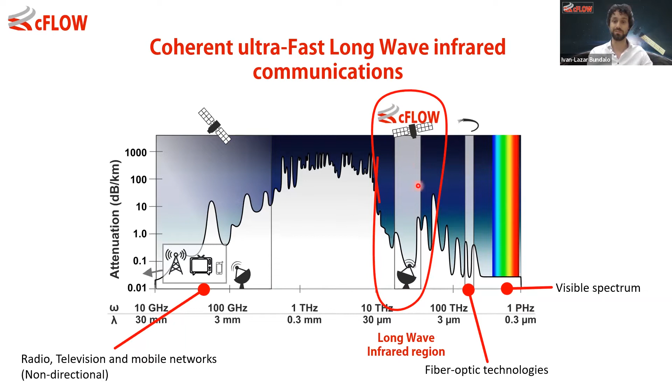That's the region which, as you can see over here, also has a dip in the atmospheric absorbance, which means that the light can go much further through the atmosphere. And as we've shown in some of the previous webinars, the effects of the atmosphere are much lower. So cFLOW is the project which is aiming to develop this wavelength region and all of the corresponding technologies.

So the goals of the project are really to develop this 8 to 14 micrometer part of the spectrum for free space communications, which so far was untapped, and to develop it for the unmatched speeds of 20 to 100 gigabits per second. These systems would be operating at room temperature, and they would be very compact, so they would be using photonic integrated circuit technologies.

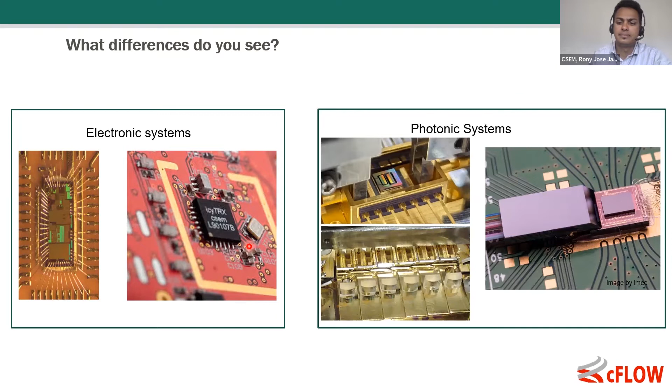I promise you, I won't go for a coffee. I'll still be here. So 10 seconds. Okay. I know you cannot speak because Lazar has muted all of you.

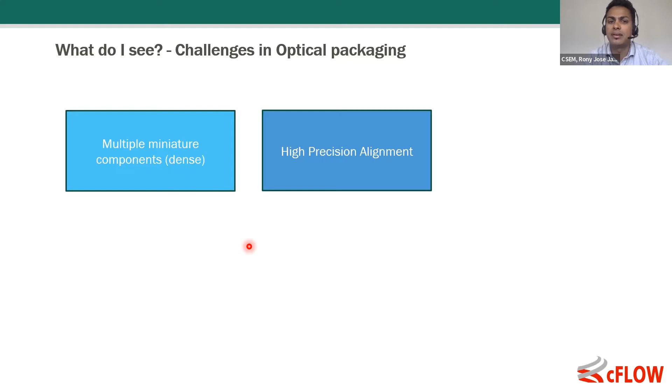So what I see actually is a lot of multiple miniature components, and they are very densely packaged in the optical or photonic packages compared to the electronic systems, obviously. They are densely populated, but aligned quite well to each other. And what you also see is a lot of metals. No PCBs, you see mainly gold and copper, which is basically the thermal management. There's a lot of heat. The lasers are not really highly efficient, so you need to transfer a lot of heat.

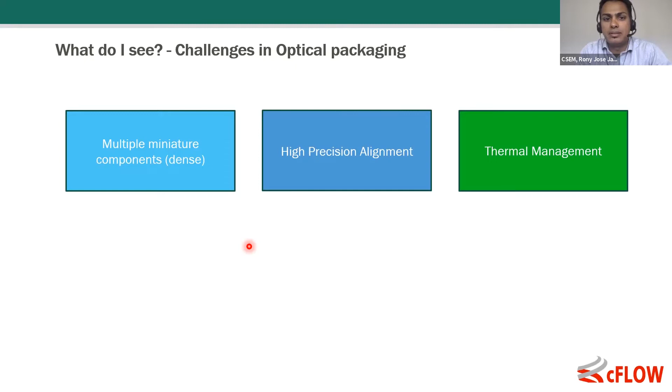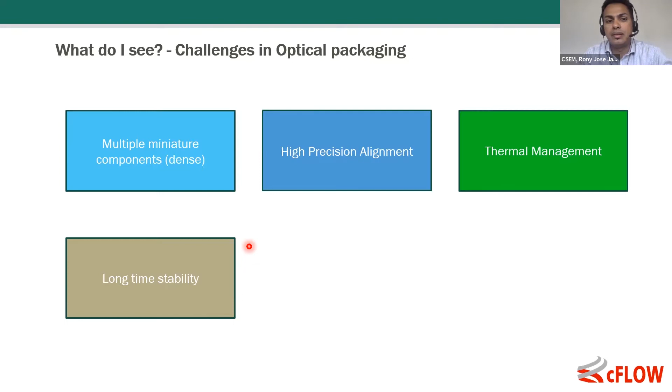Not only that, you also have to keep the lasers or other optical components at a specific temperature to have them operational with the right specifications. Other issues that you don't see, obviously, are long-term stability. If you have an aligned system, you don't want to lose the stability for years to come. That's why it's also important to seal it hermetically and to have everything really stable for a very long time. And compared to the electronic system, you also need optical transparency here.

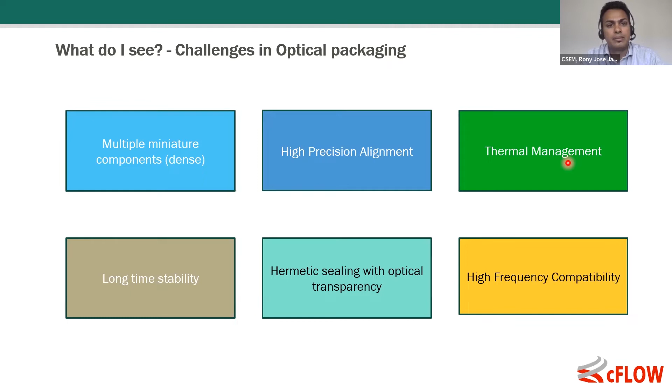And what Lazar showed you right now is that we need very high frequencies. Otherwise, it doesn't give an advantage over other systems, because the biggest advantage in cFLOW is the very high bandwidth we can reach. So it's important to have very high frequency compatibility. Right now, I will focus more on the multiple miniature components and high precision alignment, because that's what we are focusing on in the cFLOW project.

Obviously, the other things are also important, like the thermal management. We are also focusing on it, but right now less. And the high frequency is also very important. But I will speak more about the multiple miniature components and the high precision alignment. And in the project, I think we are not going to work on hermetic sealing and long-term stability.

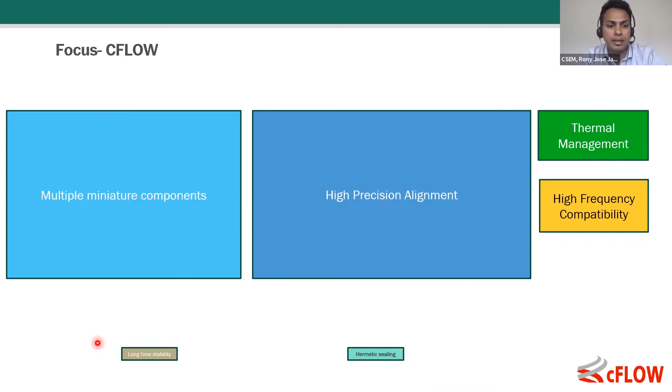So active alignment, so high precision alignment. There are two different types of alignment, as you might know already. One is the active alignment, where you have, for example, a fiber which is coupled into a PIC. In active alignment, you align the fiber to the PIC by seeing the output of the PIC to see how much power or intensity is coupled into it. And so you have a feedback loop. You check how much intensity you have, and you change the fiber accordingly, and you move it until you have the best configuration.

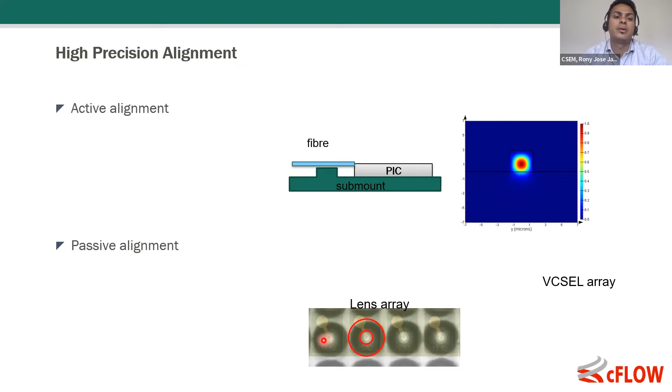But in a passive alignment, you don't have a control loop. Basically, what you see here is, sorry, that was a mistake. This is a VCSEL array here, and this is a lens array. So if you have very accurate structures which you can align to each other, then you can just bring them together with the machine in a passive way. So what you do is look at different structures on the chip and the lens array, and then you have a very good alignment. The difference then is that you don't have a control loop, so you don't see the output. You're just focusing on the structures on both the chip and the substrate.

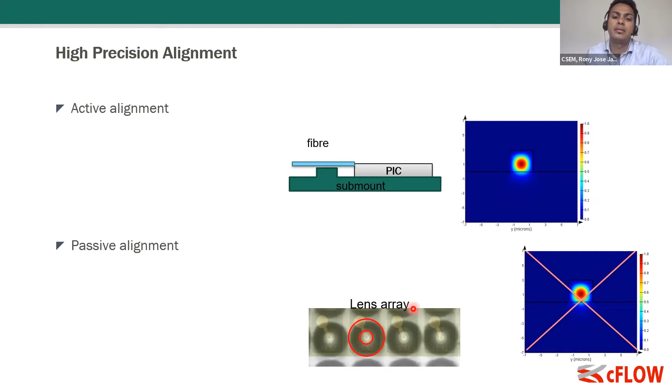So what is the difference between these two? Basically, as you might have already guessed, passive alignment is quite fast compared to the active alignment. So in principle, that also says that the cost of the passive alignment is much lower compared to active alignment. Passive alignment usually takes much less time, can be less than 1 second in some cases, depending on the accuracy required. And in active alignment, you have tens of seconds to maybe minutes, depending on the complexity of the parts. The industry standard for passive alignment has come maybe near to 2 micron accuracy tolerance, but with a little bit more time. So it's not so fast as 1 second, but it needs more time.

So I give you a couple of examples of passive alignment and active alignment. This is, for example, a transceiver application, that's what you see here. What we have to do is to have VCSELs and then use optics to couple it into a fiber which is outside of this package. This is a good example where we can use passive alignment. As you see here, this is the ray tracing simulation, the sensitivity analysis to see how much tolerance you have. As you can see, it's plus or minus 10 micrometers tolerance required here. This can be easily achieved with the die bonding or flip chip machine. So this kind of application is an ideal case for a passive alignment.

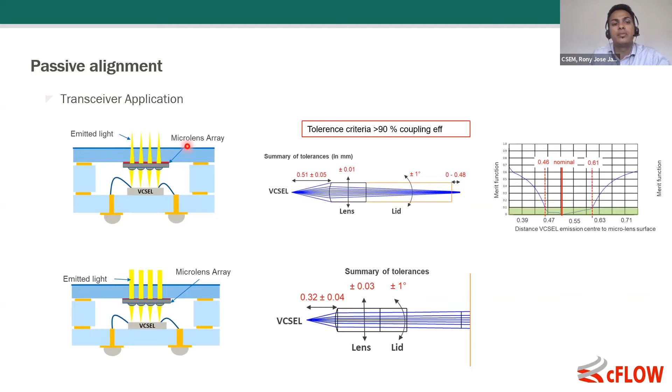And here, for example, you are focusing the beam, and here you are collimating the beam outside. In this case of collimation, you can even have a larger tolerance, so this is much more lenient compared to this case. So what was the criteria here? The tolerance criteria was a coupling of 90% or more into the fiber, which is outside of this package. So what we achieved, these are the samples we have already manufactured. This is an ESA funded project, and we could achieve quite well the 10 micron alignment tolerance that was needed for these packages. And it's passive aligned, so it's a much faster process in this case.

So in case of active alignment, why do we need active alignment then? There are cases where you need much more accurate alignments. For example, here you have a fiber and you want to couple from a PIC, which has a very small size compared to a fiber. The fiber is only 9 microns, and your tolerances are maybe 1 to 3 microns. When you couple the PIC to this fiber, this is quite difficult because you have a large difference in the modes. So you have to use an edge coupler. As you see, you increase the size of the mode field to around 3 micrometers here. And then you have an alignment tolerance of less than 1 micron, which is very difficult to achieve with passive alignment.

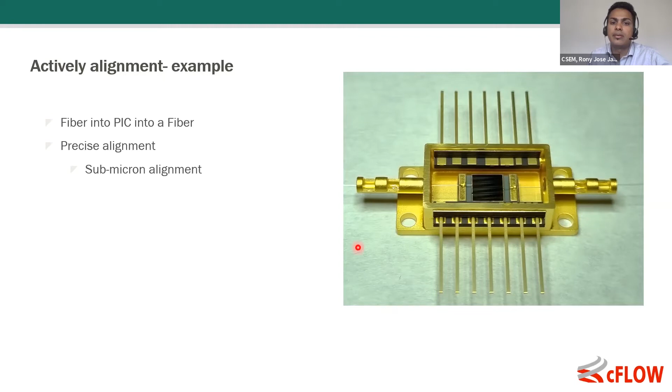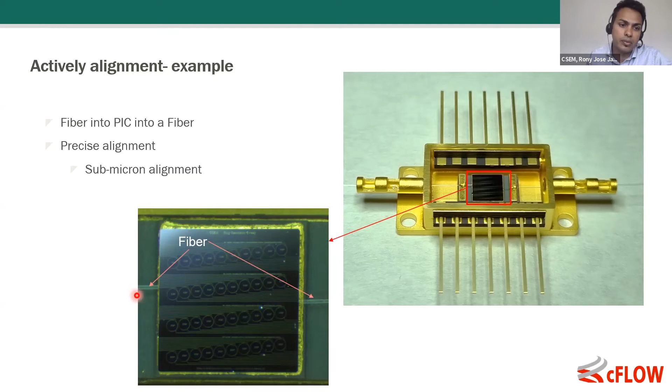So this is an example where it would be very important to have an active alignment compared to passive alignment. So this is an example of such a system which was fabricated here. Here we have a fiber which is coupled into a photonic integrated circuit and going out into another fiber. So here we need a very precise alignment, and this was done with active alignment with sub-micron accuracy. So this is just magnification of the PIC and how the fiber is coupled into the PIC.

So I have a video of how this alignment is done. So as I told, the passive alignment is improving and active alignment is improving. So active alignment is improving in the sense that things are getting automated. So a lot of processes can be made much faster. So I have to start the video now.

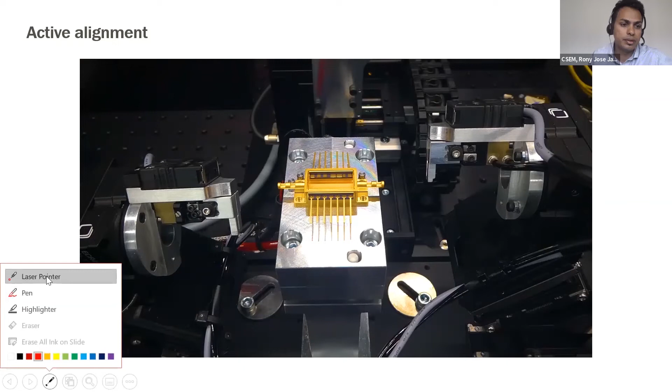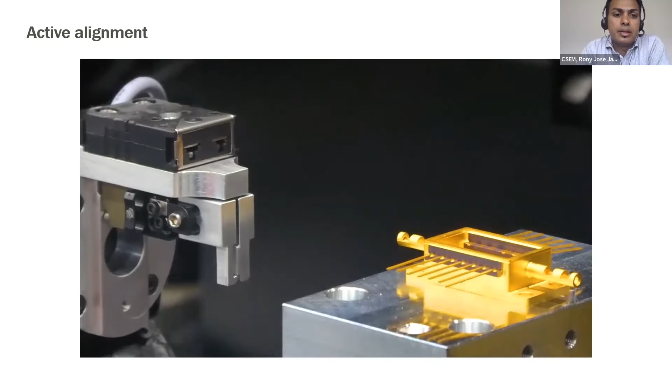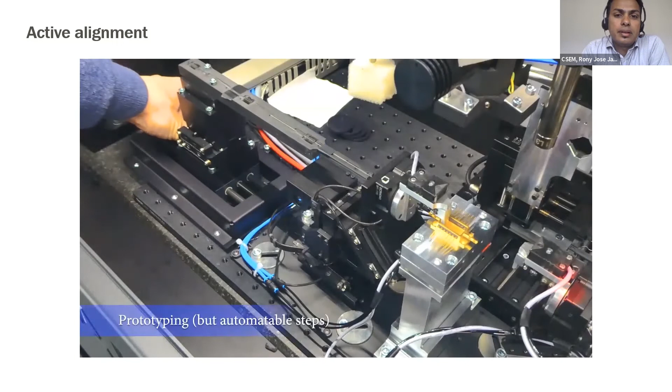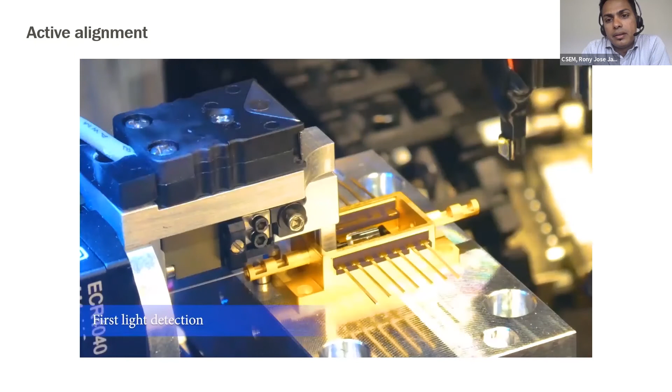So what you see is first the calibration of all the stages. It has 6 degrees of freedom. And now this is a fiber feeder, which is coming into the package. And then we are inserting the fiber here, which is right now manual, but it can be easily automated. And now the active alignment phase, where you come with a photo detector on the other side to see how much laser or light is coupled. And so you can align actively depending on the output on the photo detector.

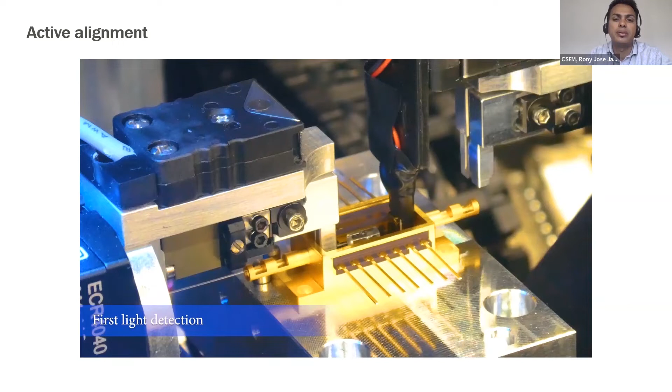So that's one of the examples where we need active alignment. So this is basically what you see on the photo detector. That is how you manipulate the fiber to get the best output out of it. So what is happening now is, as I said, the passive alignment is trying to improve and active alignment is trying to improve. So passive alignment is going more in the range of 1 micrometer, and active alignment is going in the other direction, where it tries to be faster by making automated processes.

But there are still some advantages of each of the methods. For passive alignment, we can use many different bonding methods after aligning, like soldering or silver sintering or adhesive bonding, which is not the case in active alignment. You're restricted to adhesives because you cannot heat up the part during active alignment, or it's very difficult, and you have less freedom to move when you have a solder or a silver sinter.

And right now, for passive alignment the equipment is quite standard or state of the art, so it is less expensive in many cases, depending on the accuracy. And in the case of active alignment, it can be more expensive. Obviously, we still have less accuracy in passive alignment compared to active alignment. And for the benches, you need very highly accurate structures on the substrates to have the alignment properly. So this is also very important.

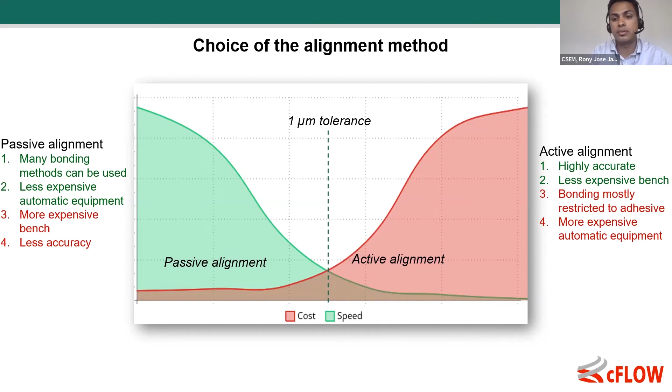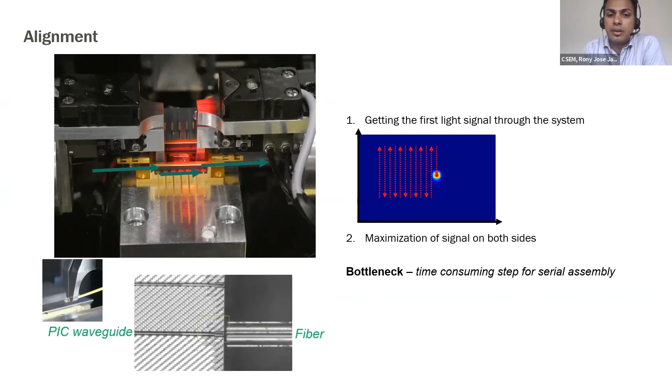So as I said, with active alignment, what we are trying to improve is to have the processes more automated. The most time consuming part here is to scan. So first you have the first light detection, to find where the light is when you couple in, and then to find the optimum, it takes a very long time actually. So there's a lot of steps involved in this. As you can see, you have to scan the whole area, and once you find the spot, then you have to scan it fine to have the best output. So this is where a lot of time is needed for this step.

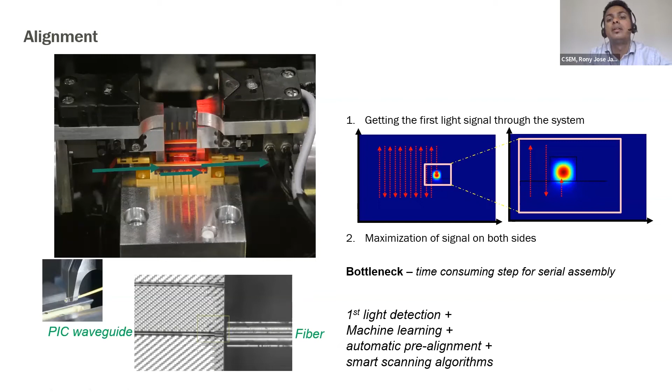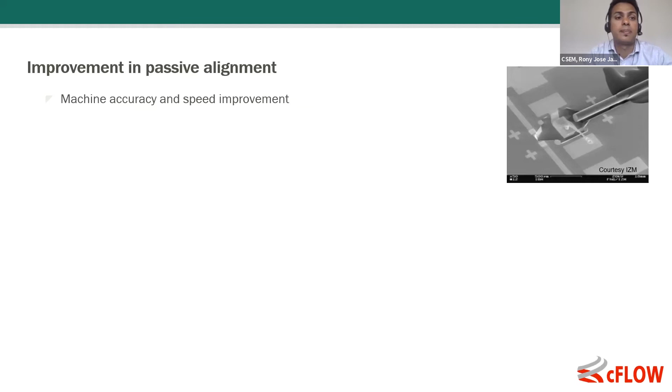So what we are working on is machine learning and other smart algorithms to improve the speed at which the active alignment can be done. On the other hand, for passive alignment, more work is being done on machine accuracy and speed improvement to have a very fast process, and obviously improving the alignment accuracy with very accurate structures. Like now a lot of people are also trying U grooves instead of V grooves, so that it fits the fiber much better, or very highly accurate lithographic structures. So the manufacturing of the structures is getting more and more precise.

And also there is more development to make it even more low cost, using low cost optical benches, sometimes also with molded plastics. But as you know, it has less precision, so it's less accurate, but it has a very high cost advantage. So you could use it for some systems where you don't have a very high accuracy requirement.

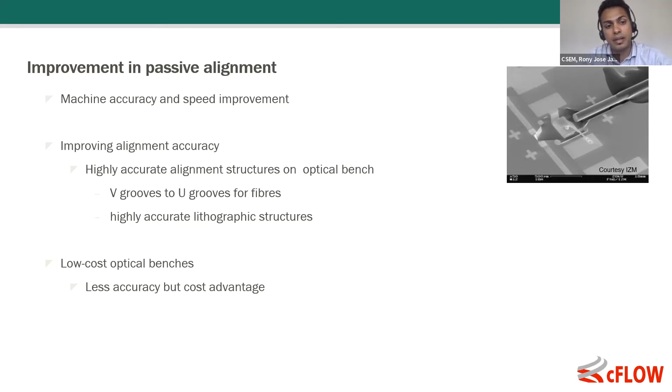What is important is they are all aligned well, and the light is going from one to the other in a very aligned way and without a lot of losses. So that's very important. So what we are trying here is a passive alignment due to many different challenges that I will explain in the next slide. And what we are depending on is using very highly accurate lithographic structures so that we can align it quite precisely.

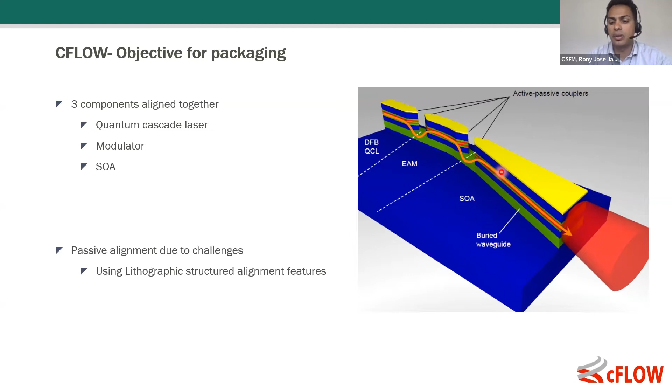So what we are doing is a butt coupling approach. So this is a QCL, a modulator, and the amplifier. As it's an edge emitter, we are going to align the modulator very well to the QCL and the amplifier to the modulator in a butt coupling fashion. So this will be die attached onto a substrate, and everything has to be quite stable, and it has to be very well aligned. So we are using passive alignment.

Why are we using passive alignment? The reason is, first thing is thermal management. So we have 3 active components here, and so using adhesive is not really advisable. So we have to use higher thermal conductivity materials as the die attach material. So this is a case for solders or silver sinters or metal based joints, and this cannot be achieved with active alignment.

And the second thing is the high frequency compatibility. So we cannot use adhesive also because we want to do a flip chip so that there are no wire bonds needed on all these devices. If you have wire bonds, you are restricting the frequency achievable. As you have seen in the other presentations, we are trying to achieve very high frequencies above 20 gigahertz, much above. So it's very important that we do flip chip interconnections here.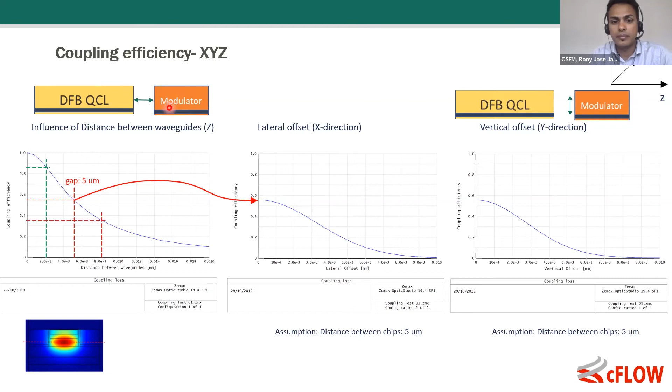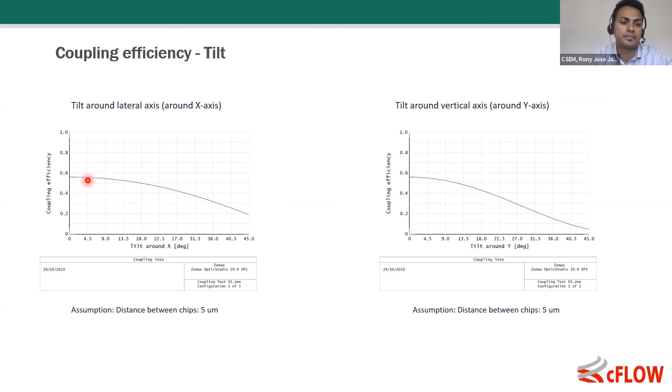So what are the different challenges here? It has to be very highly accurate placement. As I said, it has to be better than 1 micron, at least.

Always the better. If you can get much better, you have more coupling efficiency. Then we are using very thin gold-tin solder, which is less than 4 micron here, as a die attach material, so that we can reduce the Z alignment, or as we call it, the height alignment tolerance. And we have to also use a fluxless solder because we don't want to contaminate the facets, because it's very near to the solder interface.

And the design of parts to enable integration is very important. We have to really control all the sizes here of the chip compared to each other, and also the solder, so that we have the best outcome here. And it's also important to have the right material. So with a small change in the CTE, you already lose a lot of alignment.

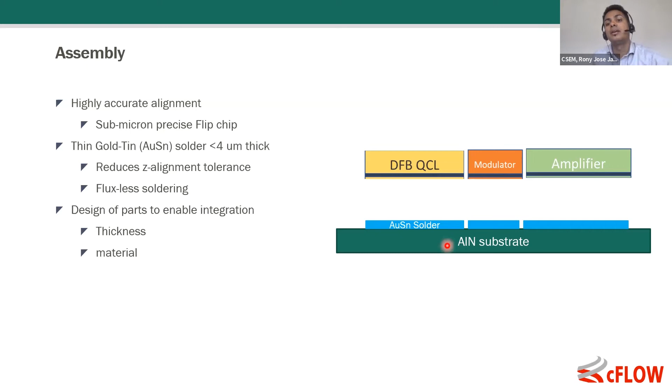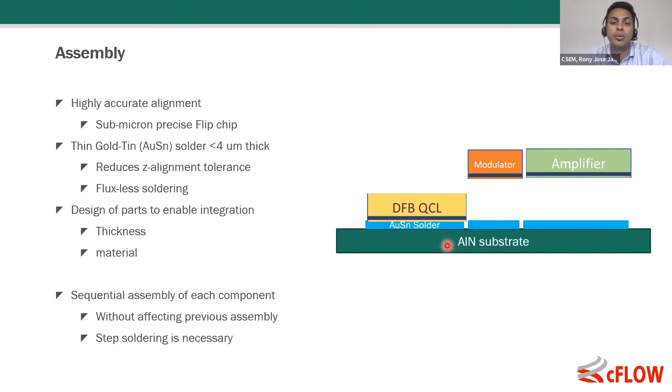So it's a sequential process. That's another challenge that we have here, which means you have to bond one after the other without affecting the previous assembly. If you're bonding the QCL first and you're bonding the modulator second, you don't want the alignment to be lost for the QCL bond. So this is very important that it stays there when we do all the processes for all the steps.

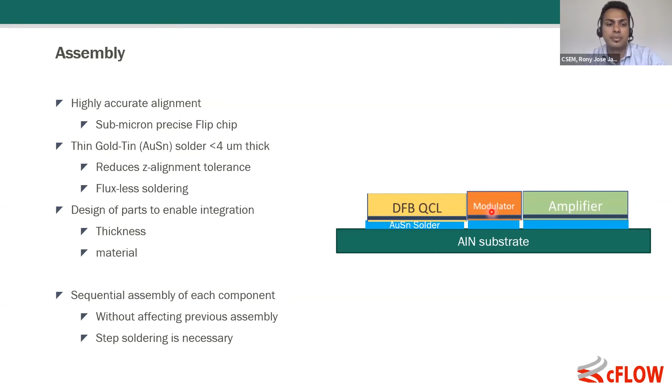So what we are trying to do is to use a few different approaches of step soldering, which means basically that you don't remelt the part which was already bonded when we bond the other parts. So the first method that we are trying to use is transient liquid phase bonding, where we change the phase of the solder so that it doesn't remelt anymore at the melting point of the solder.

So once we make a bond, for example the bond of the QCL on the aluminum nitride substrate, we change the phase into a gold 5 tin or zeta phase, which wouldn't remelt below 400 degrees. This makes it possible to do the other assemblies without disturbing the first bonds. This is one option that we are doing.

Here are some cross sections that you see. This is as deposited. Then you form the eutectic solder, which is the melting solder. And finally, you have the TLP phase, which is the gold 5 tin phase. The solder joint is completely changed into this phase, and now it won't remelt after that.

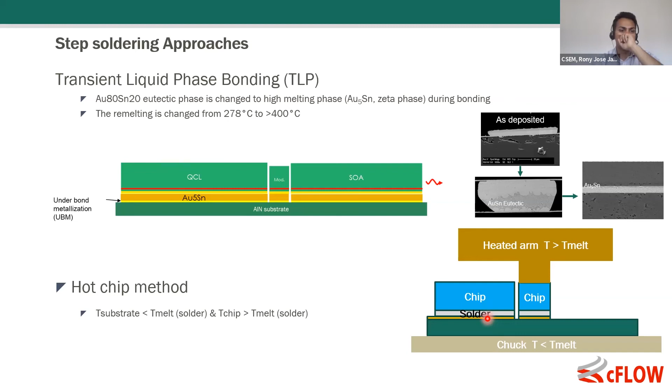What I would like to show now is some of the preliminary results that we achieved. As I said, parallelism and alignment accuracy are very important here. What we achieved, as you see here, is a QCL and a modulator bonded one relative to the other. And we could achieve a parallelism or height control of 0.5 micrometers. So this is quite good in terms of the requirement for this system.

And the second thing is placement proximity, which was very important, as I mentioned in the previous slides, which is the distance between the QCL and the modulator. And as you can see, we could achieve a very good placement accuracy or proximity, and this is also less than 3 microns. So I think we would be able to achieve better than the specifications at this point.

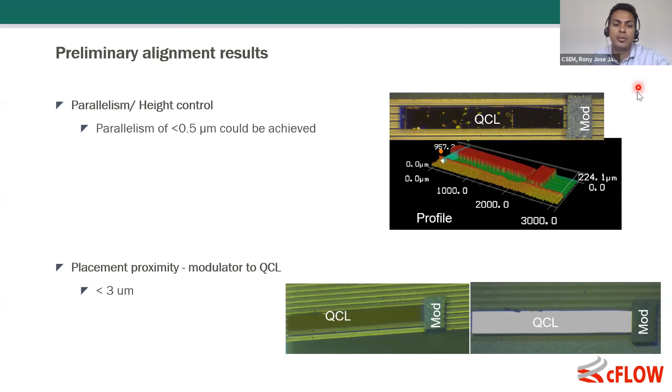But I should say we haven't done any real tests with real devices. These are dummy devices, so we will have to wait and see, or we really have to test the output of the laser power to be sure that everything is working properly. But this is a very good start, and we hope to go forward, and maybe in another webinar we will have more results on this.

So what are the other challenges? I was focusing on the alignment, but as I said, there are a lot of other challenges for photonic systems. What is very important is thermal management, so that all the heat generated by the devices is managed and taken away. We also have to control the temperature to less than 1 Kelvin, or even better than 0.5 Kelvin. So this is also a very big challenge, and it also has to have very high frequency compatibility.

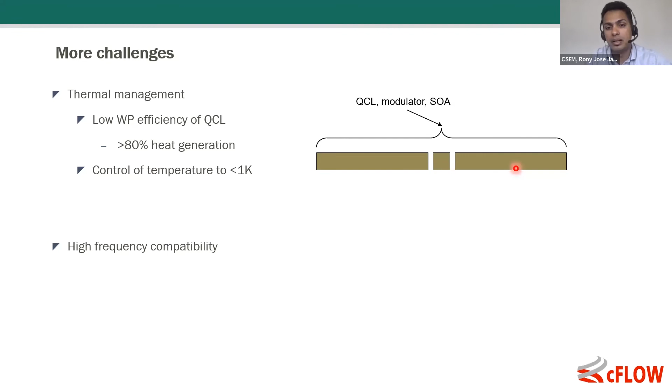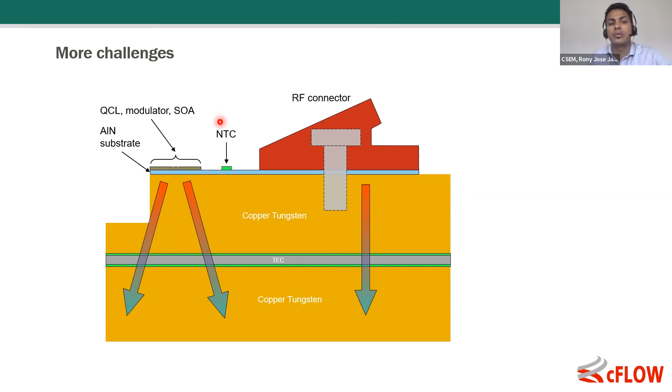So what we were focusing on is this right now, but in principle, this system will really look like that, where you have a lot of thermal management materials here, like you have a heat sink and a TEC, and again a heat sink or a cooler to reduce the temperature and to control the temperature. On the QCL, we will have to use a control loop with the NTC on it. And also the high frequency is also important.

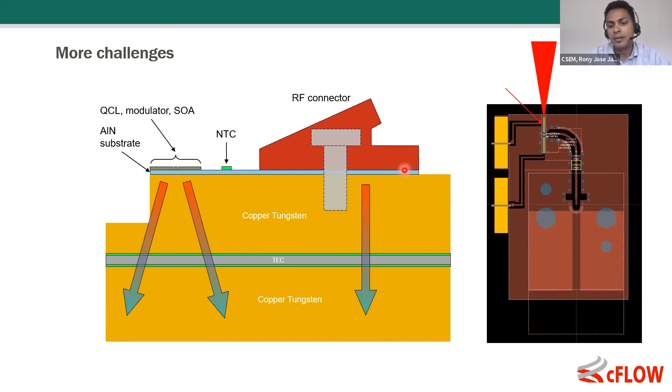So what we are trying to do is also to have everything integrated, also to have the high frequency connectors which can be directly implemented or contacted on the substrate here, where we have aligned the parts together. So conclusion is, packaging has multiple challenges. So what we have to be very careful is the design for integration. So the integration has to be thought about already before designing the parts or components. And it's also important to think about the probabilistic design for reliability, which means you also have to think about reliability, what kind of materials to use.

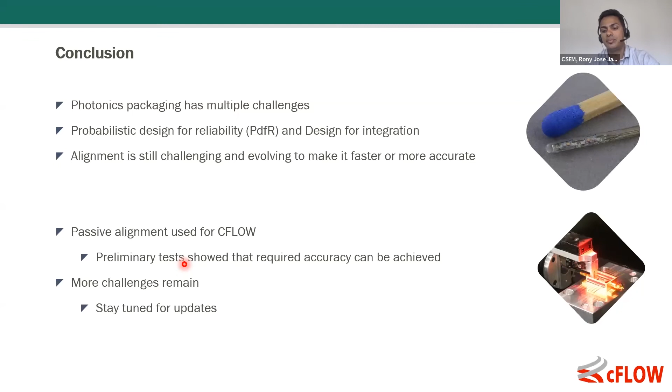And alignment is still challenging, but evolving to make things faster in case of active alignment, and more accurate in case of passive alignment. And passive alignment used for CFLOW, as you can see, preliminary tests show very good results that the required accuracy can be achieved. But more challenges remain. So I think maybe we'll have another webinar to talk more about the results we achieve here.